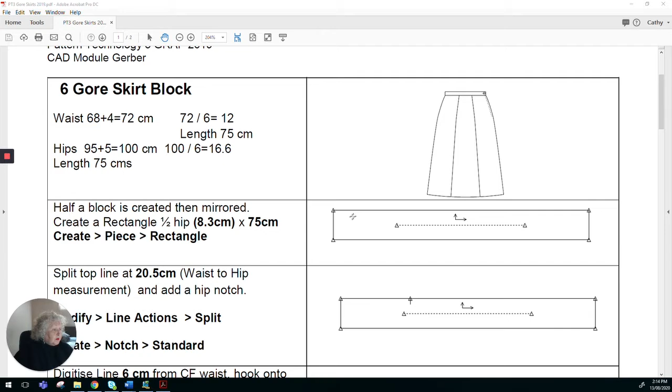So we start with a rectangle, we adjust it at the waist to get the correct size at the waist. We add some extra swing at the hem and then adjust the shape of the waist and the hem, and finally we'll mirror along the central line. So that's the idea of the process.

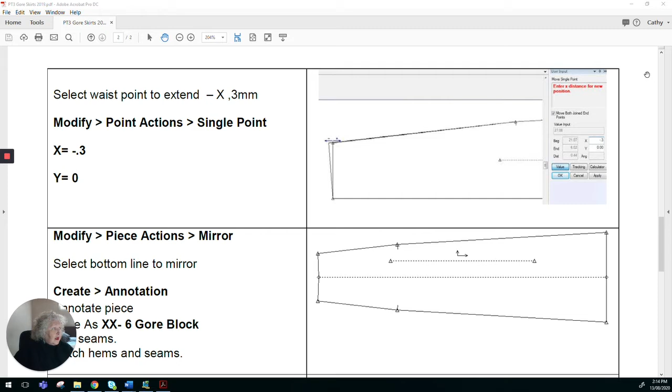To create it, we'll go to the Create menu and choose Rectangle. And I'm going to go into Value mode and create a rectangle that is 75 in length. That can vary. That's the length of the piece. And I'm going to do 8.3 in the width. So I'll just start that again. Value, click once, 75 and 8.3.

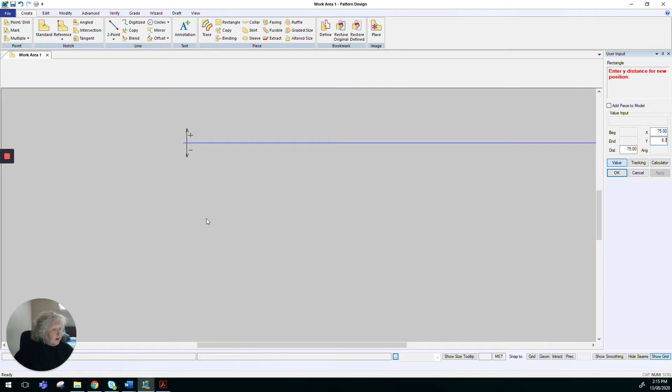So that's the width of half of the hip on the panel. Right click and OK to accept that name. And then I'm going to just zoom in on the piece to start doing the adjustment. My first thing is to split this top line. So modify,

split line action, right click and choose distance from point, drag to the corner, and then in the distance we want it to be around about the hip level that we're splitting. So 20.5 is the measurement that I've put. And then I'm going to also create a notch at that point. So holding my left mouse button down till I hit that little point that we've created, release, and there's my notch created now.

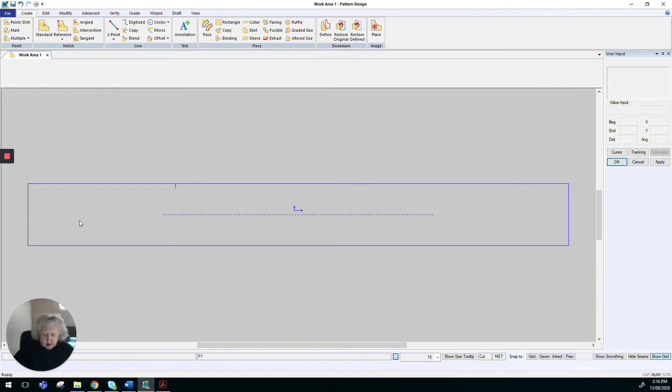Next thing I want to do is work up here in the waist area. So I'm just going to zoom in on that and you'll be able to see nice and clearly what's happening. So between here and here, I want to create some shaping. I actually want to reduce the width at the waist. So I'm going to make that 6 centimetres from the centre front out.

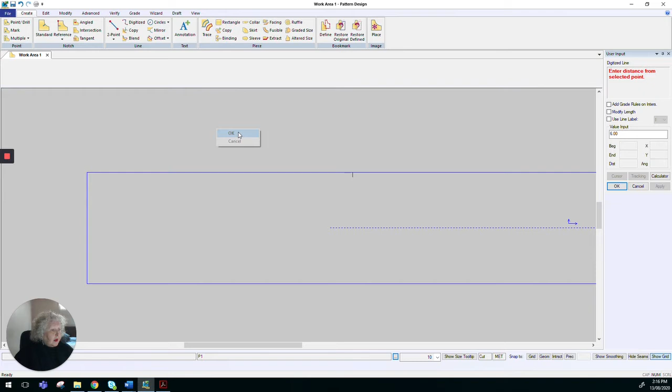So to do it, I'm going to create a digitised line, distance from point, select the point and put in 6. And we want a line. And I'm just going to click on the line and drag down till I hit that notch. End line to get rid of the line attached to my cursor.

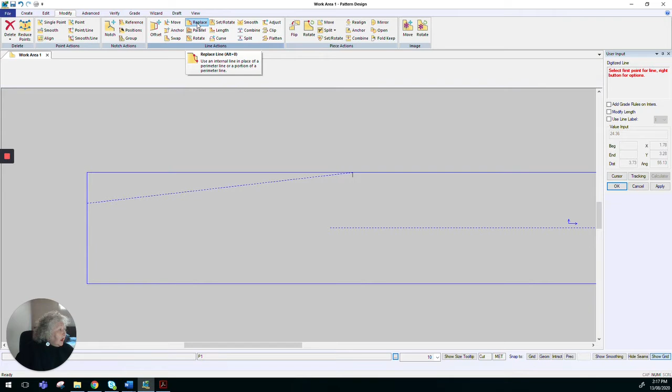So there's my shape that I've created, and I want to replace this new line and get rid of this old section. So we'll go to modify, line action, replace. We'll make sure that we select the line that we want to replace, and we'll start from here. And as you can see, that corner wedge has been removed. I'm finished with that function, so I'll just zoom out again.

And the next thing we want to do is put in a little swing on the side here. So expand the hemline. To do that, I will go into Create Offset Line and choose Uneven. Select the point to offset uneven from. Well, that's my hem corner. And I want it to be 3 wider at the hem. That's the swing or spring. Then it says select the point to, again, place the uneven. At that point there, I want it 0.

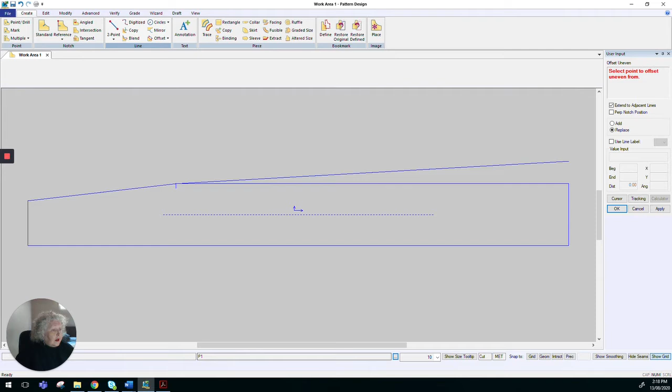So once I've done that, because I've got extend to adjacent line and replace, when I do right click, it'll get rid of this parallel line and put the angled line in. So there's my shape. What I want to do next is put a little bit of shaping at the waist and at the hem. So I want basically a 90-degree angle at each end.

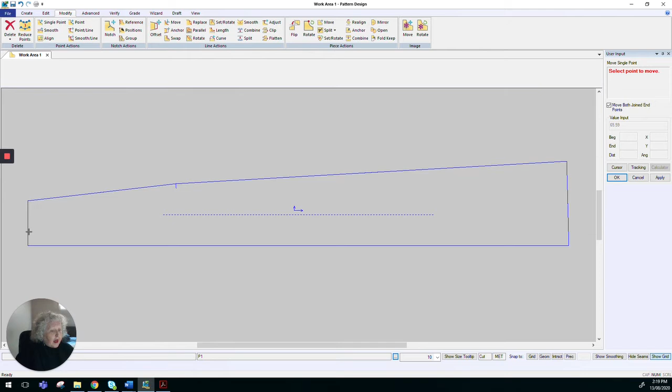So again, I'll go into modify, and this time I'm going to modify a single point, and I'll do it in value mode. Selecting that point, I want it to be negative 0.3 or 3 millimeters, and the same at the waist. I want this point here to be negative 0.3, and I don't want any width added, so we'll just change that back to 0.

Doesn't look like much has happened, but when I open it out, you'll see that there's a nice smooth line at the waist and at the hem, so that when we join those seams together, we don't get any peaks and valleys at the hem or the waist. So once we've done that, the next step is to create a mirror line here. So we're already in modify. We want to go to piece actions, mirror.

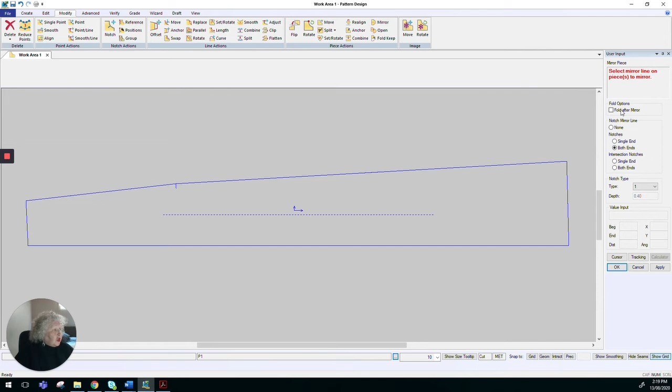I'm going to uncheck fold after mirror. I want it to open out. That's the mirror line. And now you can see I've got my full piece there. I can actually get rid of this mirror line. I don't need that anymore. So while I'm in modify, I'll go to delete line.

I'll get rid of that line, and I will move the straight grain so that that's aligned with the center, and I'll adjust the length of it under modify, line actions, adjust. It's telling me to choose the end that I want to adjust. So there we go. I've got my straight grain extended.

It's not going quite down to the hem, not going up to the waist either. Now I must have had notch option selected whenever I did the mirror. I don't really need those notches, so I'm going to get rid of them as well.

Just get rid of them by going to Modify, Delete, Notch. Now that I've got this piece here, I'm going to save it as initials and skirt 1.

This is just the basic panel, the main panel, so I might call it main as well. Once I've done that, I can right click and OK, and I'm going to put it up into the icon bar. So right click, piece to menu, and you can see up here it's now there as the main pattern piece.

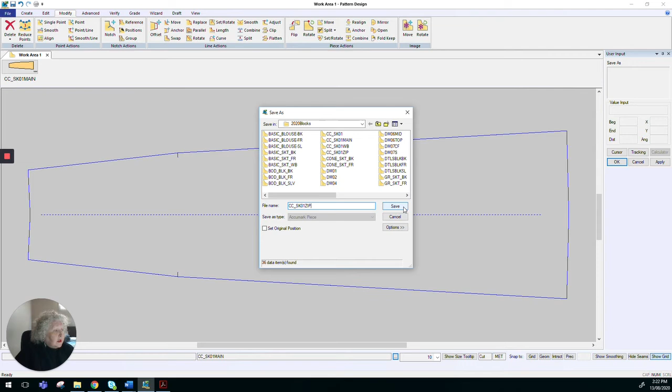So I'm not overwriting, I'm creating a new section. And yes, I want it to be in there, and I'm going to go piece to menu. So you can see I've got 2 pieces there now. For the zip piece, what I want to do is create that extra seam allowance area here.

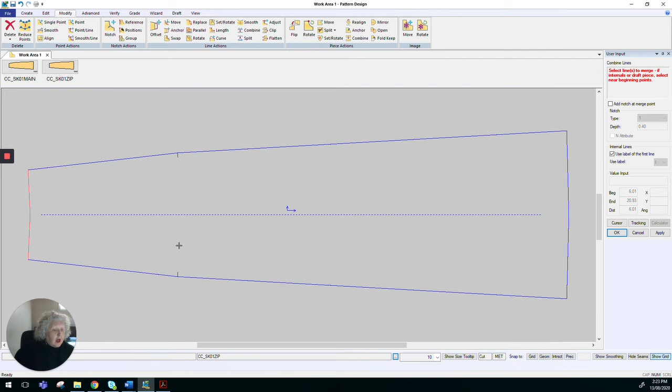First of all, I need to create my seams. To do that, I'm going to connect some of these pieces of the pattern where the lines have been split. So I'm going into Modify, Line Action, Combine, holding down my Control key, selecting sections of the line, and when I've finished, releasing the Control key. So 2 sections of the line, release Control key, and the same again at the hem, release Control key.

Now I can add all of my seam allowances, Advanced, Define. I'm just going to say 1 centimetre everywhere at this stage. And then I can change my hem to 3. So that's a nice quick way of doing it. I'm going to swap them over.

Now I'm going to work on this little step area. So I'll zoom in here. We'll have a look at the top section again. To do the extension, I'm going to go to corners, under Advanced Corners, and I'm going to choose perpendicular step.

So the idea is I want a 2 centimetre seam in this area where my zip is. I'm going to make sure that in my user input I've got curved intersection selected, and I'm going to select the corner. So this is where there's going to be a corner created. So I'll select that area.

Then it tells me to select a line before or after that point. Doesn't matter which one it is. Select the line that I want to modify the seam allowance on, is this one. And I actually want it to be 2 centimetres there. So you can see it's created that extra step.

And where I want the curve is in here, so it makes it nice and easy for the machinist and the cutter. Because I've got that on cursor mode, I can just move my mouse and it will change that squared corner into a curved corner.

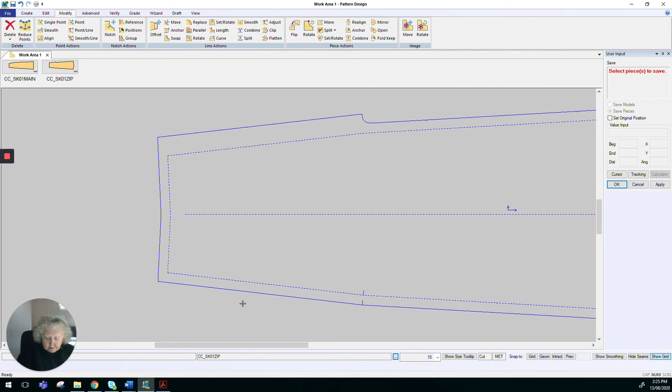I'll go in and modify it to combine the lines. Number 1, I'm going to combine these lines and these lines. So it's just parts of the pattern that I'm combining the lines.

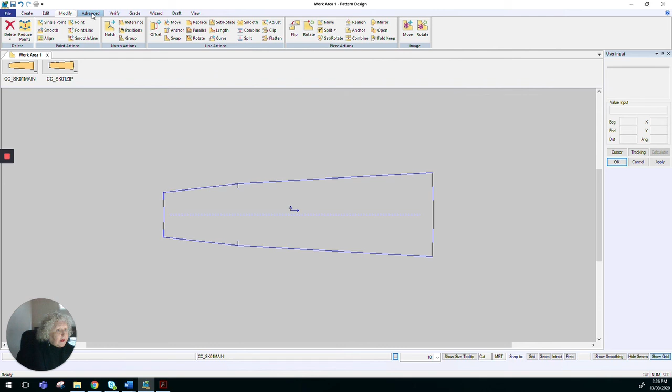Once I've done that, I can go into Advanced, Define Seams, add the seams to all of it as 1, but change it there on the hem to 3. And then I can swap them over.

And then I'm pretty much right, except for adding my notches for the hem and my annotation. So adding notches for the hem, you can go into corner, regular corner. Make sure that you've got the notch type as either perpendicular or extension, and the notching line, either the first or the second. Essentially, we want at least one line to indicate what our hem is going to be.

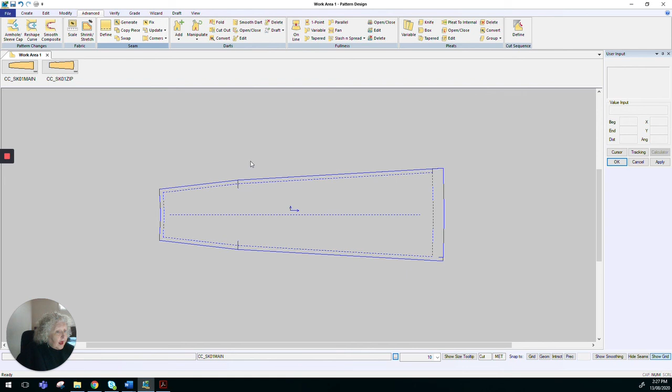So I'm dragging to the corner. That's put it in for the hem, and that one's put it in for the seam allowance. And of course, I can do a similar thing to my zip panel. So I'm going to save this one again.

Okay, clear the workspace, and I'll just do my notches. Because I've got a 2 centimetre zip here, I want a zip seam. I want to put in a corner there as well with my notch. So there's a 2 centimetre notch.

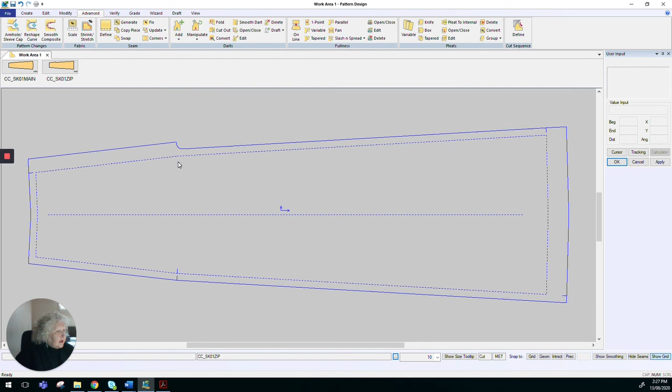Here and here. Okay, and that's me pretty much done. Just add all your seam, your annotation. Make sure you've got a waistband added, and you've completed that style.